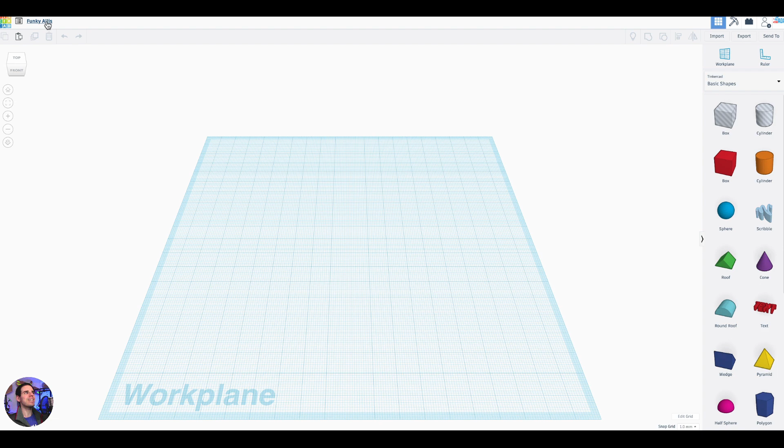Up at the upper left-hand corner, we have the name of our item, which we can change. It just gives us a random name. We have some options here like to copy, paste, duplicate the items, and delete the items. And we have our undo and redo buttons.

Also, you can navigate around the workspace using this little three-dimensional box thing right here. And here we have some different viewing options. What you can also do is just right click and hold, and that will rotate you around the work plane.

Or you can, in my case, I have a little scroll wheel on my mouse, and I can click down, press down on the scroll wheel, and move left and right around the work plane. By the way, I am on a Mac, but the controls should be mostly the same if you're on a PC. You can also do shift and right click and hold it down to do that left and right movement as well. But for me, it brings up the right click menu, so I just don't use that.

On the right-hand side up at the top, we have import, export, and send to options. We have the option to create a work plane, which we don't need to do right now because we have this one. We do have a ruler option, which we will use in just a moment. And then we have basic shapes.

So on the right-hand scroll bar, we have all these different shapes. And the way Tinkercad works pretty much is they give you all these different shapes, and you can combine them or cut them out with other shapes to create new shapes. So it's very basic in that sense.

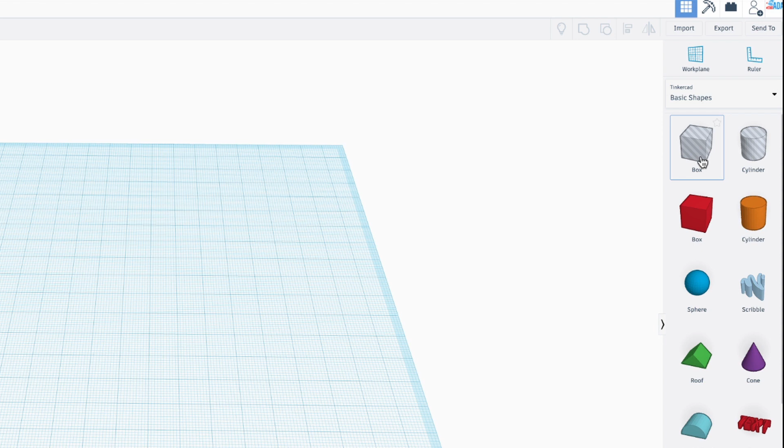You also have some other options, like you can make different connectors that they give you, some different shapes that you can work with, which is pretty cool. But right now we're just going to use the basic shapes, and these particular shapes at the top are grayed out because they will make a hole when you combine them with other shapes. Speaking of combining shapes, up at the right hand corner here we have some options to combine the different shapes, which we'll use in just a moment as well.

So that's pretty much it. And then you can use your left click and hold to select different items, for general selecting stuff. So the first thing we want to do is grab our ruler.

So we will grab our ruler, drag it, and put it really anywhere. You can pick it up and put it anywhere on the work plane. Think of the work plane like our tabletop, that's our work area.

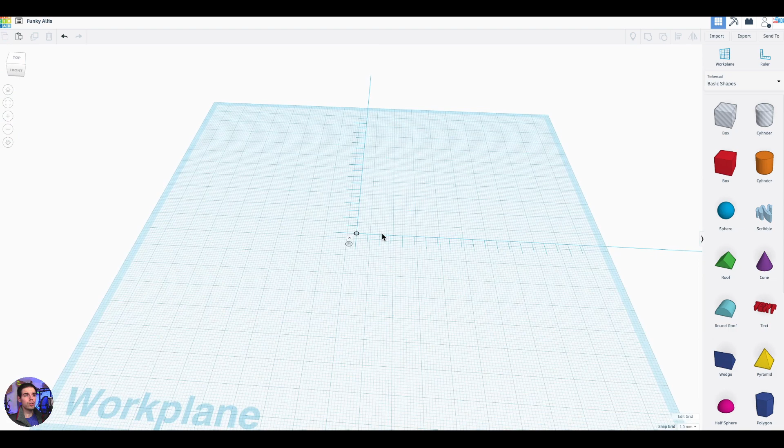Also, the scroll wheel is for zooming. So if you have a scroll wheel on your mouse, that's going to be for zooming. Otherwise, you can zoom using the little buttons on the left-hand side.

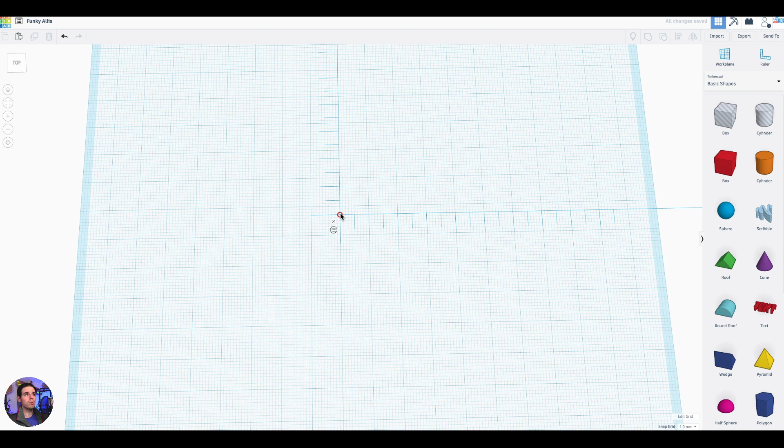So that's how you can move around and navigate in this space. The actual ruler is important because that's going to help us place things properly for dimensions. It doesn't matter where on the work plane you put it, but usually the center is where you might want to put it. What matters is that we have the ruler, and you could think of it like the y-axis and the x-axis—basically two different axes on this ruler, and that's going to help us a lot to get all the dimensions correct.

Now we'll actually start building the front of the motor mount, where the motor will attach to. To do that, we're going to grab a box shape—just a box shape. You can see it's a three-dimensional shape. Let me move it right over here.

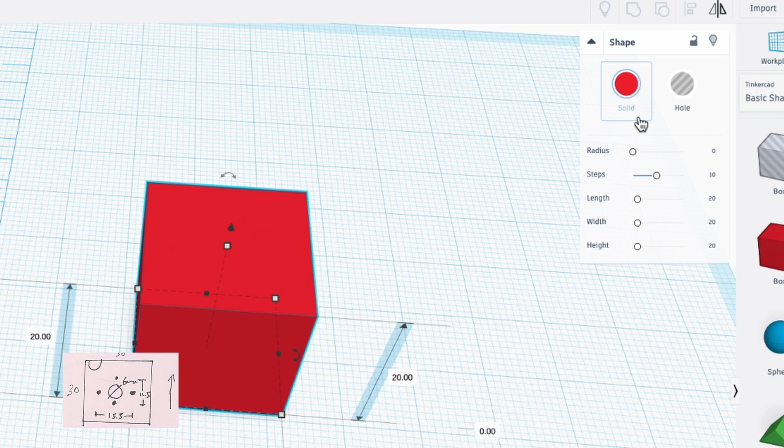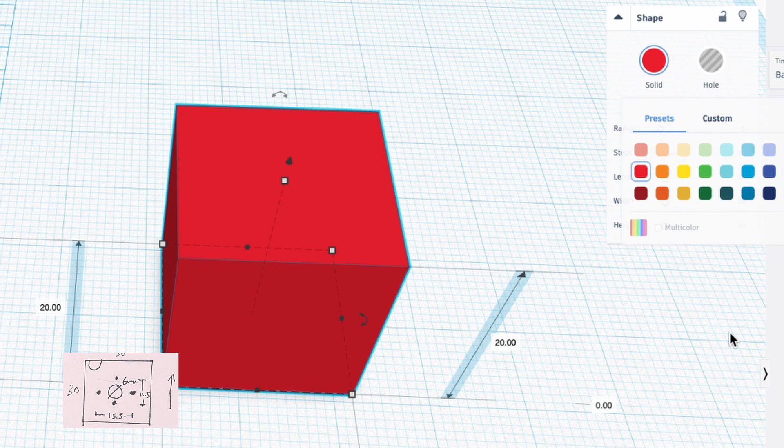So to show you around with this, in the right hand corner here we have some options. We can make this a solid shape, which is what it is right now, or we can make it a hole shape—this grayed out shape will actually cut into another shape when we combine it with another shape. So if you want to make a hole in something, that's great, which is what we'll be doing in just a second. But for now, let's leave it solid. You can also change the radius of the edges, and the steps of the radius, but we'll leave it just square for now.

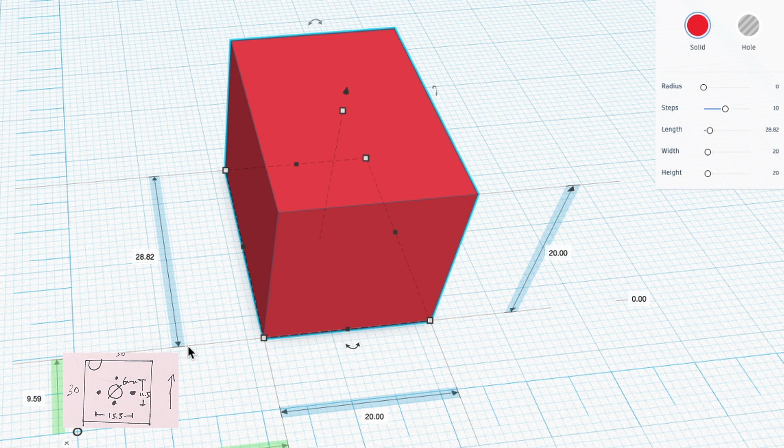You can also change the length and width and stuff—that's one way of doing it on that little menu right there. Speaking of dimensions, you'll see these arrows highlighted in blue, three arrows for the three dimensions. So we have this longer one right here, telling us it's 28.82 millimeters. Right now everything is dimensioned in millimeters.

To change the dimensions, we can grab one of the corners and move the shape around freehand. Or we can grab these white rectangles, or white squares, and just move one dimension of the shape like that. Or if it's on the side like that, we could grab it in the middle. That's how you can change the dimension there.

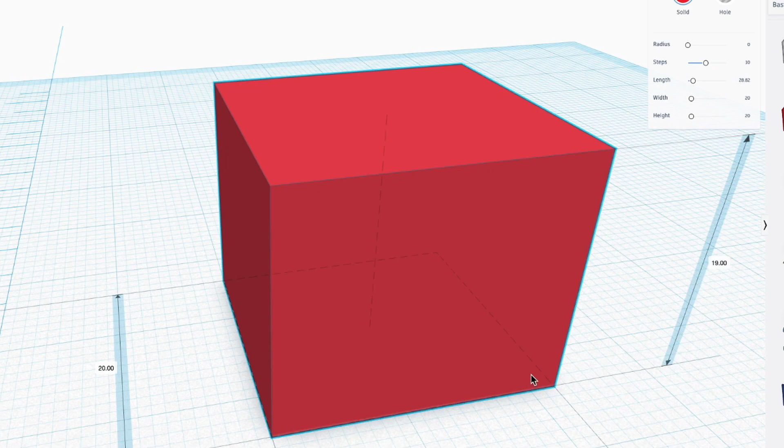The other way, which is more precise, is to actually type in a specific amount. So maybe you want like 23.5, and then you can type that in right there in those little boxes. That's usually what you do if you want a specific dimension.

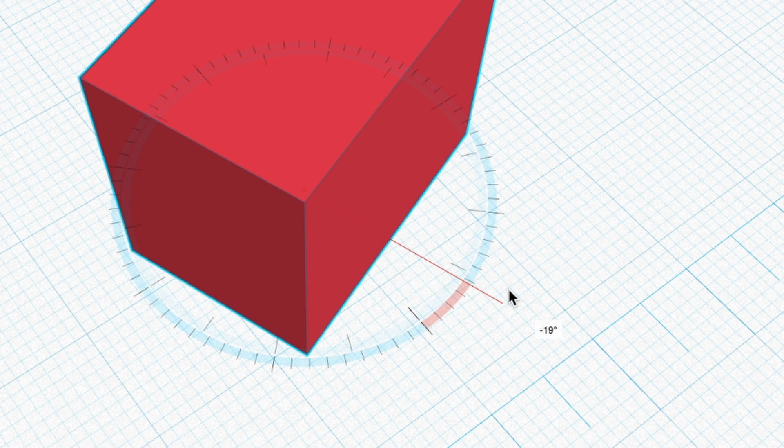As far as moving the shape around, you can grab these black cones—for moving the shape up and down, on the vertical dimension, you want to grab that black cone or triangle right there, and that's how you can move it up and down. You can also rotate the object using these rotational arrows, and it'll give you a little compass dial. If you pull out to the outside of the degree measurements, you can be more precise. If you go on the inside, it'll give you big chunks as you move it, like 30 degrees or 22.5 degrees, so you can do 45 degrees.

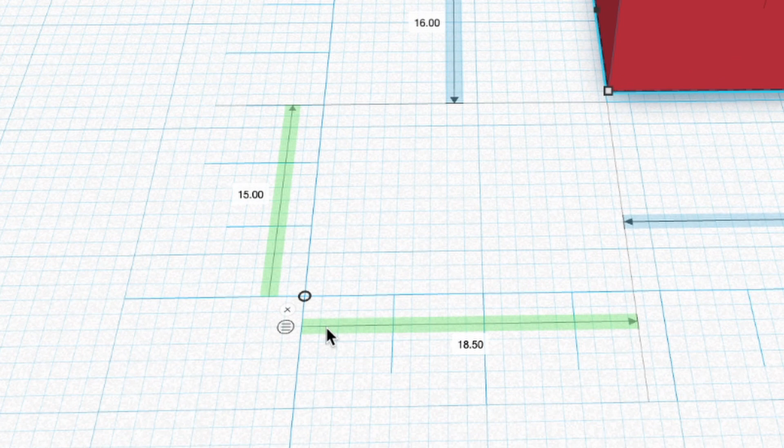Okay, we're almost done talking about dimensions, but one more really important thing: you'll see these highlighted green arrows right here. You have two for each axis, and then another one usually off to the side over here, which is for your vertical axis—that tells you how high up your object is from our work plane. Then these other two, close to the center of our rulers, tell you how far that object is from the center.

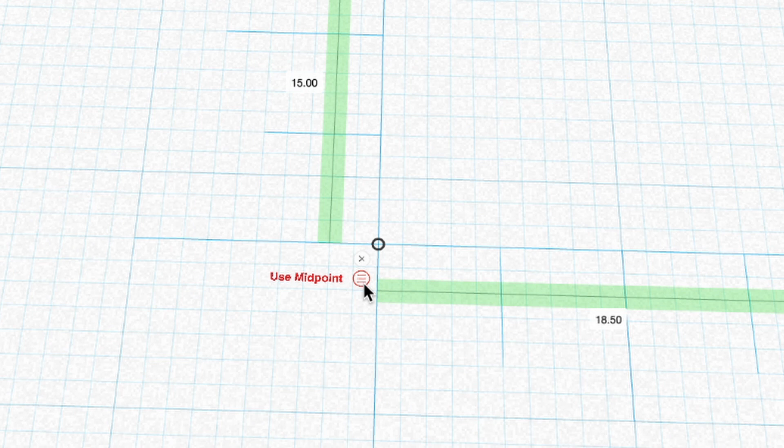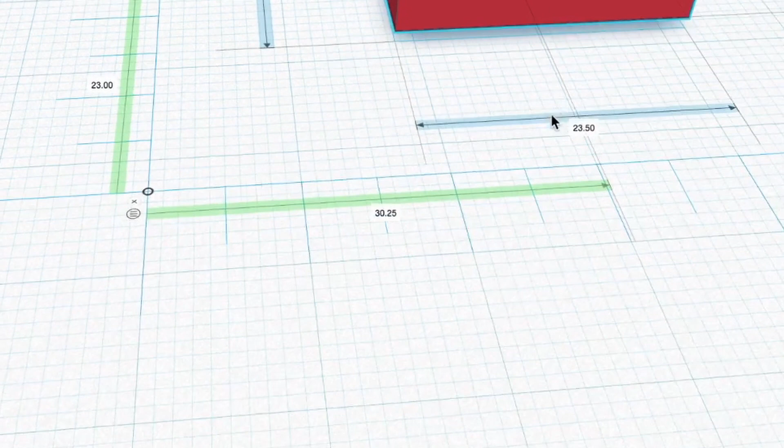Now, this is a really important point right here. This little circle with the lines through it, you'll see it says use midpoint. That's giving us the option to use the center of the shapes. So for example, when I change this, you see these shaded green arrows, they go all the way to the middle of this rectangle. And if I click on the little circle with the lines through it and say use endpoint, they will get shorter, because they're measuring to this endpoint, basically the corner of the rectangle.

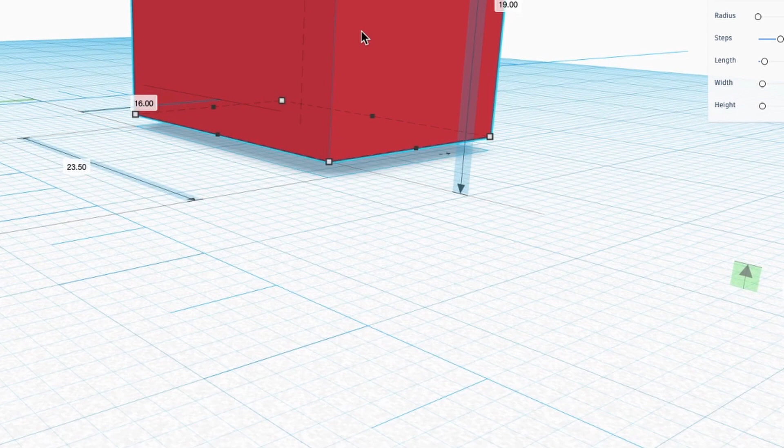Also, another thing that might catch you by surprise is this guy right here that tells us the vertical distance of this object from our work plane. If we go back to using midpoint, then it will tell us how far the middle of that object is from the work plane. That could be confusing if you're trying to get everything at the same height. So keep in mind that that's going to always be half of the actual object, or half of the object plus the distance that it actually is off of the work plane. Just keep that in mind, but we shouldn't run into too many of those problems.

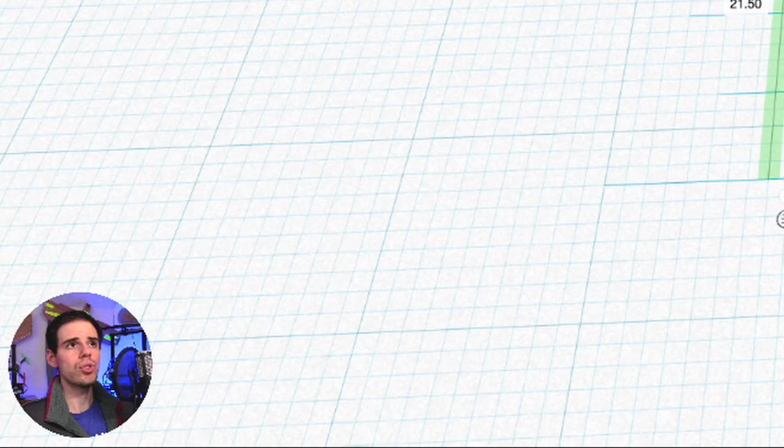So we're going to start with this basic shape here. Again, we're using the midpoint of the shape, and let's make sure that shape is actually touching the work surface. So I can drag this down a little bit and it is flush there, and you see it snapped into place, and that's because if you look at the bottom right of the screen, where it says snap grid, it tells you how precise you want the snap level to be.

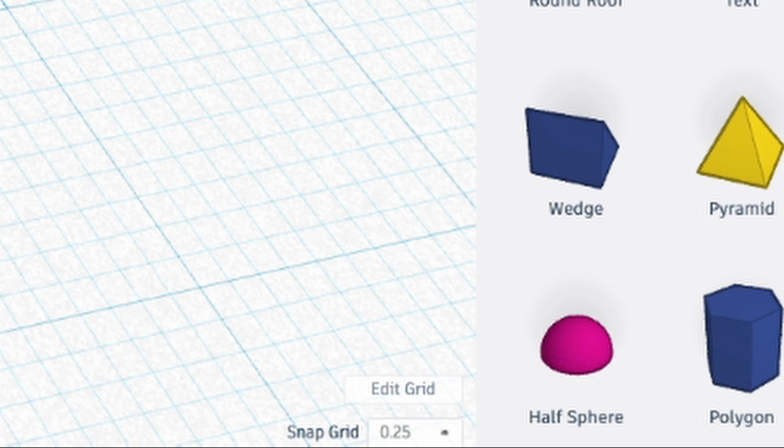So you could say 0.5 millimeter or 0.25 millimeter. I think we'll need 0.25 millimeter probably. I like to keep it pretty precise. And so that allows you to be more precise about how you position your object.

So now that we have that taken care of, what we can do is we can center this square, or this rectangle shape, right in the middle of our workspace. And so to do that, we can take these two highlighted arrows and make them 0. I'm going to enter 0 into those little boxes, and you'll see it snaps it on both axes to the very center of our ruler, and that's very useful.

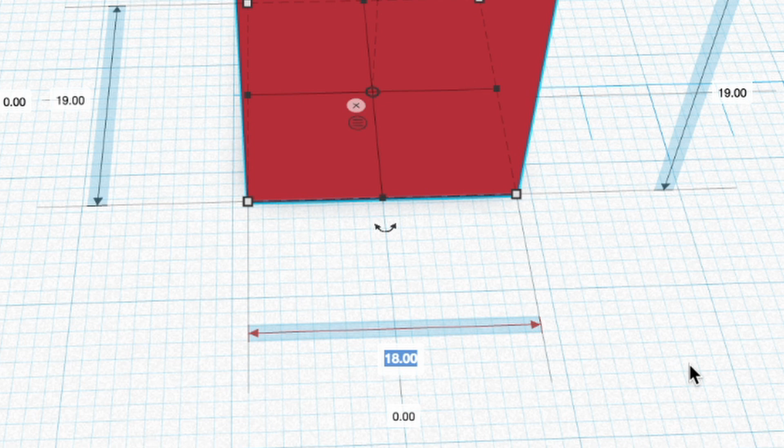So now we can dimension the box, and as we wrote out, we want this to be - because again, we're going to work on this and then rotate it and flip it upward, or we really don't even need to do that necessarily - but anyway, this is the part where the motor actually attaches to. So this is going to be 30 by 30, and again that is millimeters. And then for the thickness, let's do 3 millimeters and see how that works.

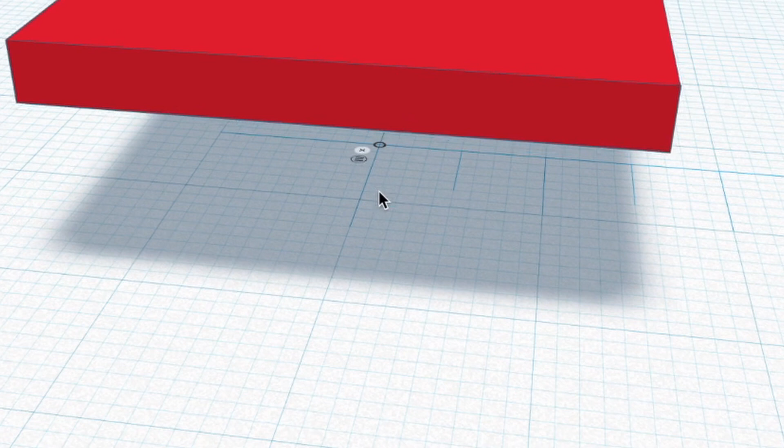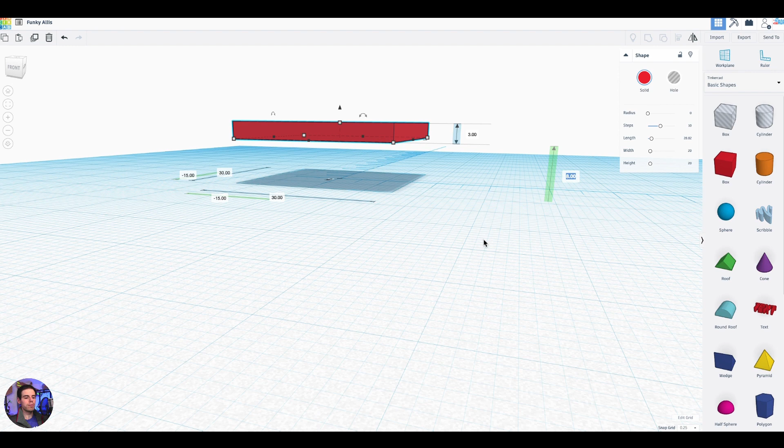Now you see here, because we have this set to the center point, it actually sort of squished it. It changed the dimensions from both ends. So that's kind of annoying. So an easy fix for this whole thing floating in the air, to get it back onto the level surface, is we can change our reference point to use endpoint, and then we can go over here - this is telling us that this block is 8 millimeters above the work plane - and we'll just type 0 for that, and then we can change our reference point back to the center.

So you see those lines, they change from the center to the corner there. Okay, cool. So now our basic shape is done for the front of it.

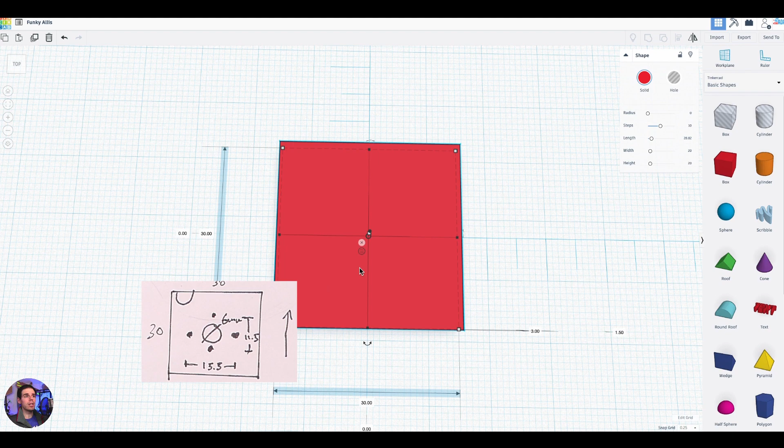Now we need to make the holes for our motor mounting screws and the cutout for the actual motor shaft and retaining clip, because you always got to remember that, because that's one thing I always forget. So what we'll do is we'll get a cylinder in the right hand corner here. We'll just drag out a cylinder. You can see that cylinder is way too big.

And the little shape menu here will say we want it to be like 64 sides, so it's nice and smooth. And then we'll change the dimensions of the cylinder, let's say for the center, let's make it 6 millimeters, a 6 millimeter diameter hole. And the height does not matter because we'll just be adding it to the shape and it will sort of disappear.

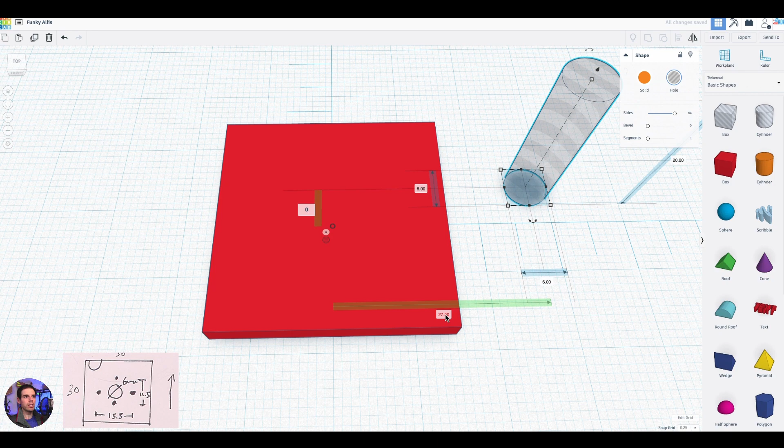So here we can again center it. So we'll, on those green shaded arrow bars and the little number box, we'll type 0. And I'm just typing that and pressing enter. And so that works well. So just to show you how this works when we have a hole object or a grayed out object, you can see on the underside, you can see actually where the object is as well.

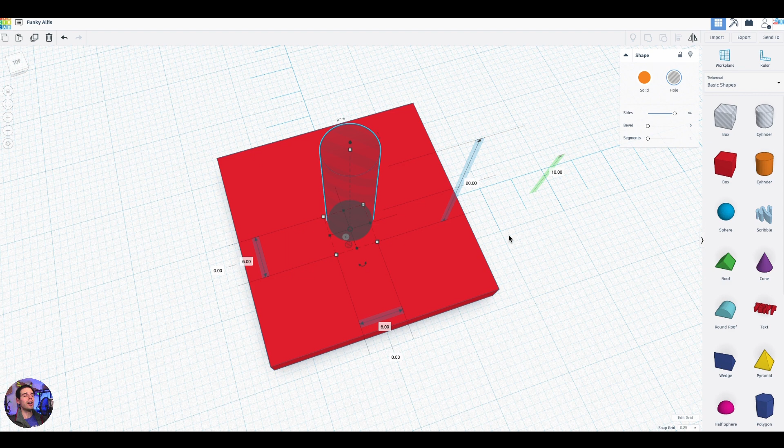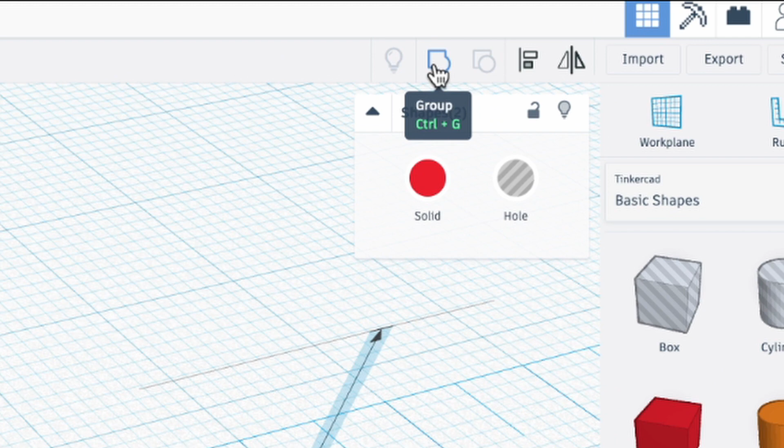Okay, so just to show you how it works when you combine two objects, you can either drag this little selector over all the objects and it will select all of them, or you can click on each object and then click shift, click on an object and then click shift, and it will select both objects. And then over here in the kind of top right corner, you see it says group. So you could also do control group or control G, and we'll group it, and then shabam, look at that. We have a nice, perfect hole in the center of this square.

And so that just kind of makes that shape disappear, basically. If you want to undo that, you can click ungroup, and then it will bring back the cutout shapes.

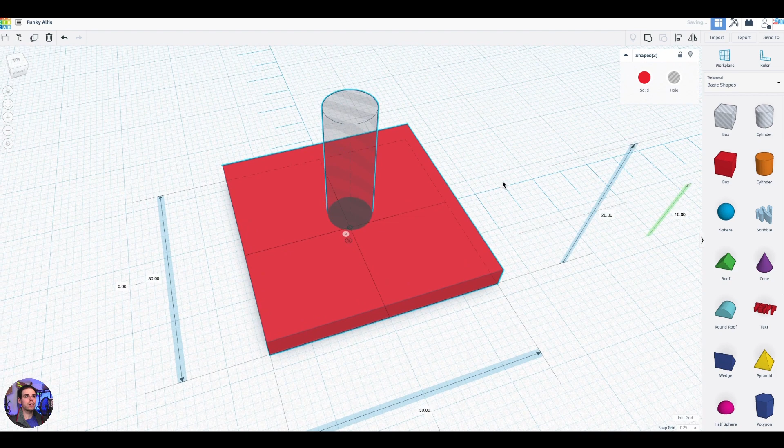Now I'll show you what you can do to copy this. You can actually, on a Mac anyway, you can hold Alt and then drag the object, and you will create a copy of it. Or what you can do is you can select the object, and then you can click duplicate and repeat, and then you just drag the object out, that duplicate object, and you can drag it wherever you want.

So now what I'll do is I'll change this from, instead of 6 millimeters, we'll change this to, let's say 2.5. That should be somewhere in the right area. And we may even want to use washers anyway with this, but we'll say 2.5. Give it a little bit of margin for error there.

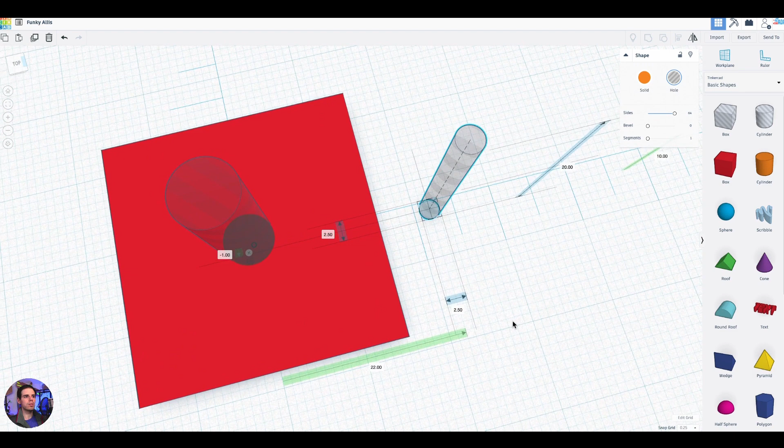Uh-oh. Well, that is one of the downsides of using an online editor, is that if you don't have internet, you can't edit anything. Okay, we're back. That was weird, but we are back.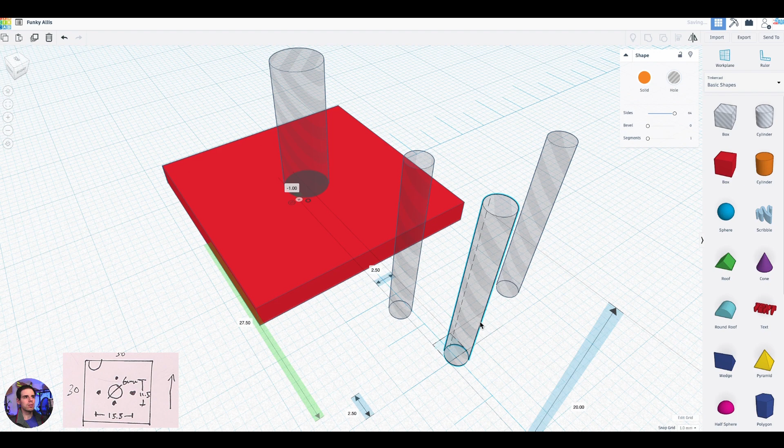That happens sometimes. So now we have our 2.5 millimeter hole, and we're actually going to need like a bunch of these, so we may as well just make a bunch of duplicates. We could do that. Well, we're going to need 4 in total.

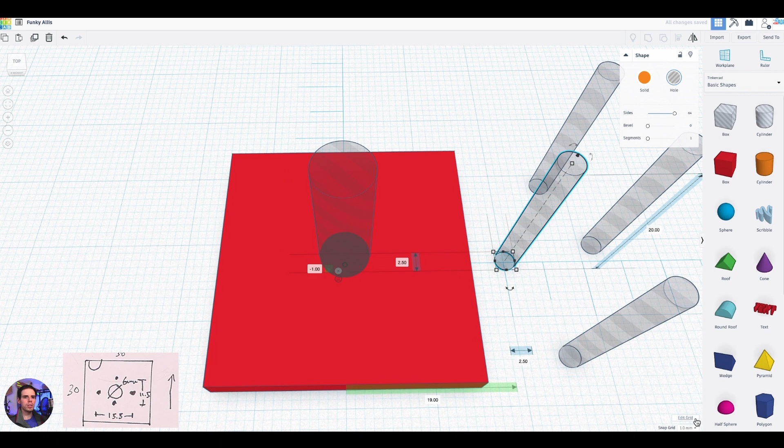So what we can do here is we said that we want vertical and horizontal hole spacing. All right, so let's knock out the horizontal hole motor screw holes. So what we'll do, oh, and you know what? When it restarted, the snap grid went back to 1 millimeter. So we need to actually change that back to 0.25 millimeters, so we have a lot of control over this.

So what I want to do is make this right on this axis. So right here you can see it says -1. I want to change that to 0 on that green shaded bar. It's a little hard to see, but, let's see, is this midpoint? Oh, okay. So we had to change it after it restarted. We had to change it back so that it would go back to the midpoint.

Let's say 0. Good, so we are right in line with this center hole of the motor shaft. So then what we want to do is, since the total distance according to the measurements we took between the centers of the holes is approximately 15.5 millimeters, half of that distance is going to be 7.75 millimeters.

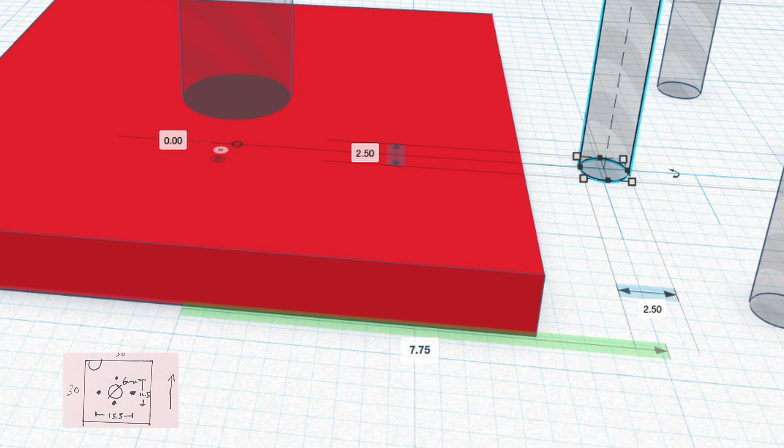So we want this particular 2.5 millimeter hole to be 7.75 millimeters from the center. In this box for the green shaded arrow, I'll type 7.75 and enter, and that's where the hole should be. So that works out really well.

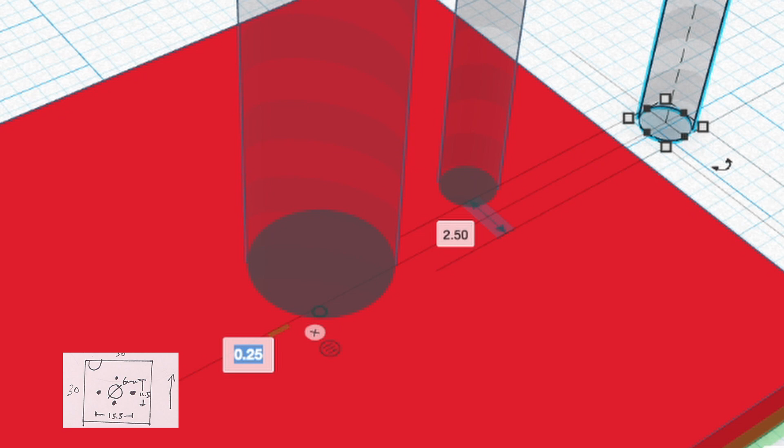We can do a similar thing for this set of holes. We have our other 2.5 millimeter hole right there, and we want this centered along that axis, the x-axis. So we'll type 0 so they're all in line like that. It's kind of hard to tell from that angle.

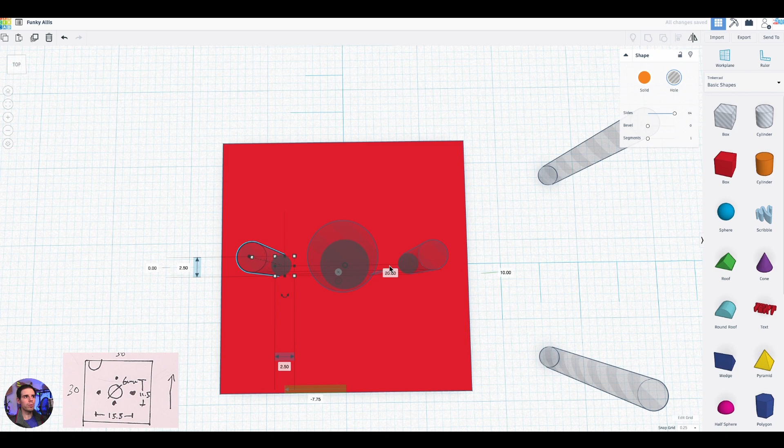Now instead of 7.75, since it's on the other side of the axis, we actually want it to be negative 7.75. I'll type enter, and look at that, it's on the other side. That should theoretically line up just right with those holes in the motor for the screws.

And we'll do a very similar thing for the top and bottom. Over here we can drag it to the general area, and actually that snapped right on the axis there. So now we can say the total distance between those two was 11.5 millimeters from the center, and again we're doing center point measurements from the center of the object.

And we can say half of that is going to be 5.75. So we'll say positive 5.75 and enter that in there. Now we can do pretty much the same thing with the other side, or the bottom. We can make sure that this is, yep, negative 0.25 off.

So we'll make it zeroed up on that axis, we'll call it the y-axis. And then we'll say we want this to be negative 5.75. That should work, unless my math is just totally bonkers, which is a possibility.

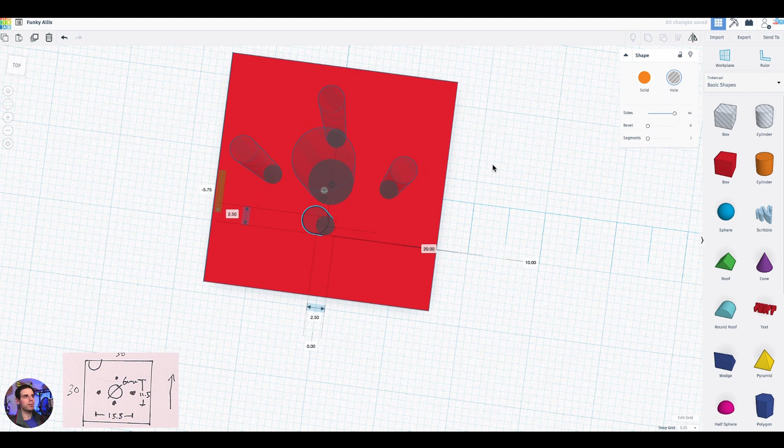So now we should have all the holes that we need in our motor mount. We have a nice motor mounting pattern right there. And again, this is just one way of doing this, just kind of slapping this together, but hopefully it's a good example. So we'll select all of these items and then click group, and shazam.

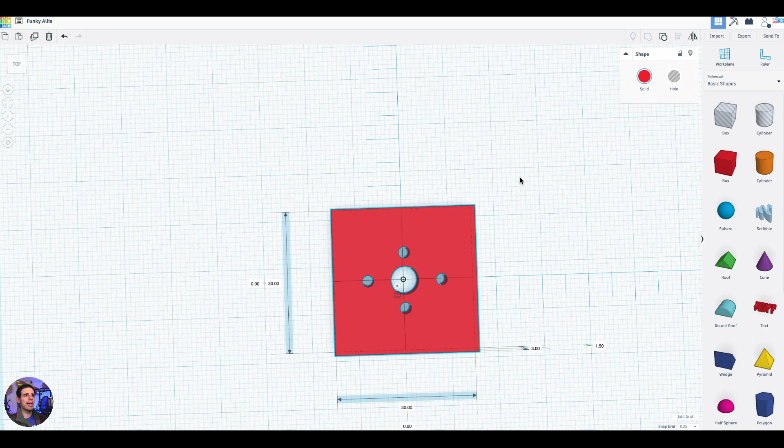One more thing we should probably add right now is a little notch for the motor wires. So what I'll do is make a little detent, if you will. I can just freehand this shape, make it something like this.

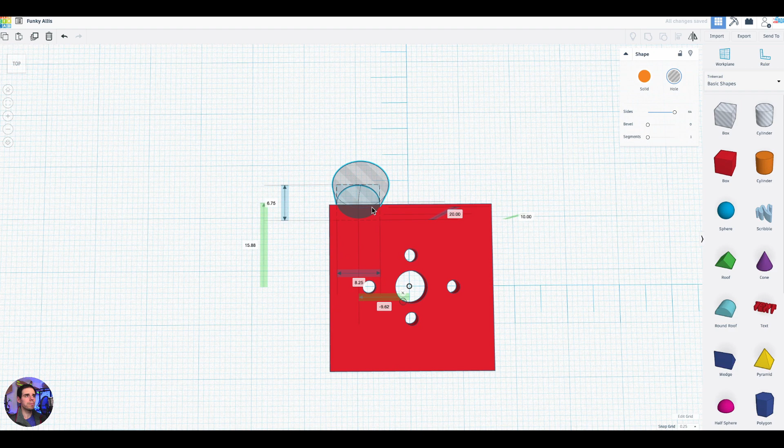Generally you want to make nice curved, smooth shapes because that results in less stress in critical areas, or it's less likely to break due to stress. So something like this, so the motor wires can come out the side or come out over the top, but not actually be above this little cutout right there. I think that could be very helpful.

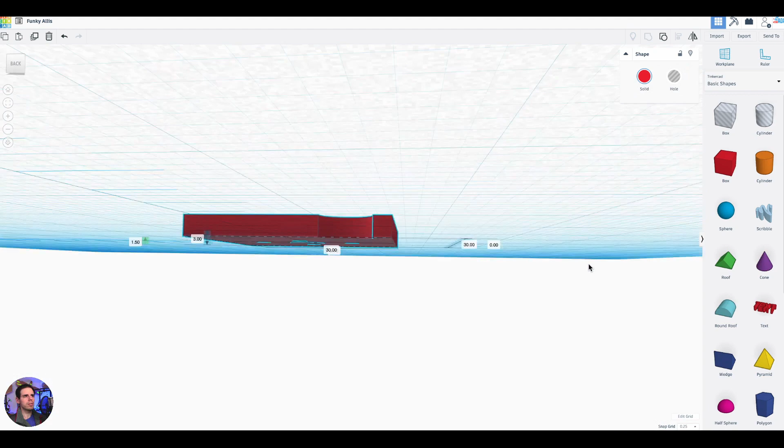In fact, we could probably bring that down a little bit more. Sure, let's try that out. We'll select both of those shapes, press the group button, and shabam, we got ourselves a new shape. It's not perfect, but that's what's cool about this, it doesn't really matter, and you do have some freedom there as far as making the different shapes.

Okay, cool. So now that we have this part, which is basically like the motor mount plate area, which you could actually just glue straight onto the end of an airplane if you needed to, but we'll make it an actual freestanding, self-supporting motor mount. Now here we have a couple options.

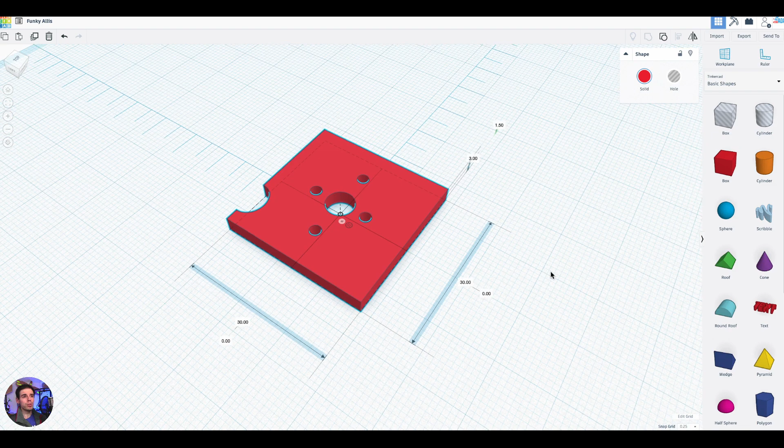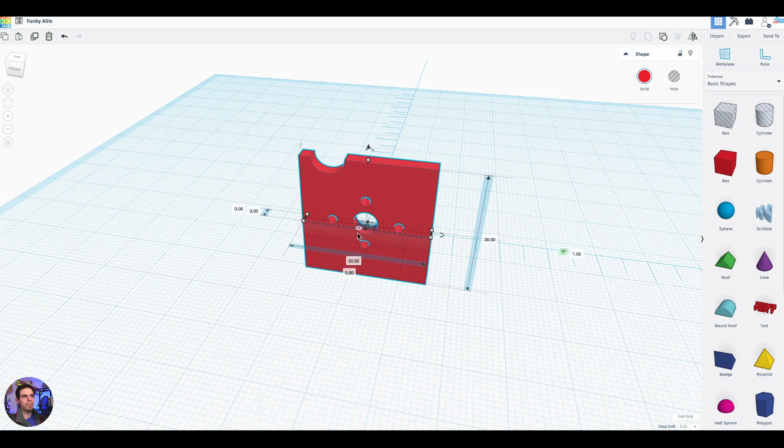We could either build the base and the sides upwards, like vertically, or we could take this whole part right here and rotate it 90 degrees, and then build it on a flat area, which I think we'll do since that gives us a better perspective of what this will actually look like.

So to make sure this isn't in the middle of the plane like it is right now, I've selected to use the end point, and I'm going over here on the vertical distance where it shows the vertical distance. I'm going to type in 0, bring that back up right onto the work plane. And then we can go back to using the midpoint because that's what we'll want to do.

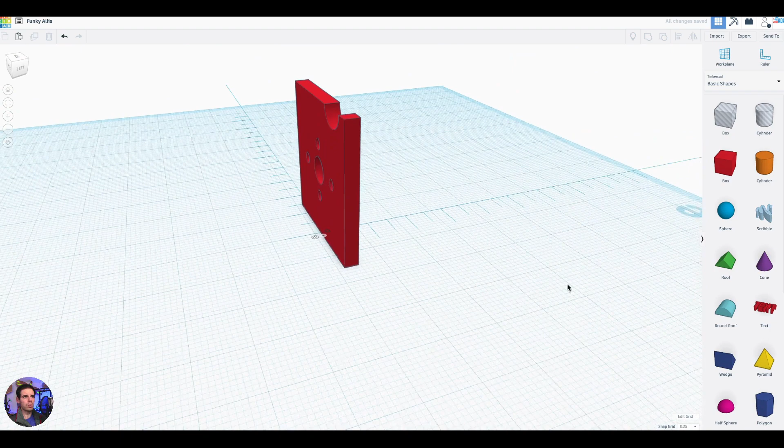What we can also do is, if you click on the very center of the ruler, it will change which direction the ruler points to. So this way we flipped it around, but I want this to be the back, so now we have a ruler on the back side of this, which is nice.

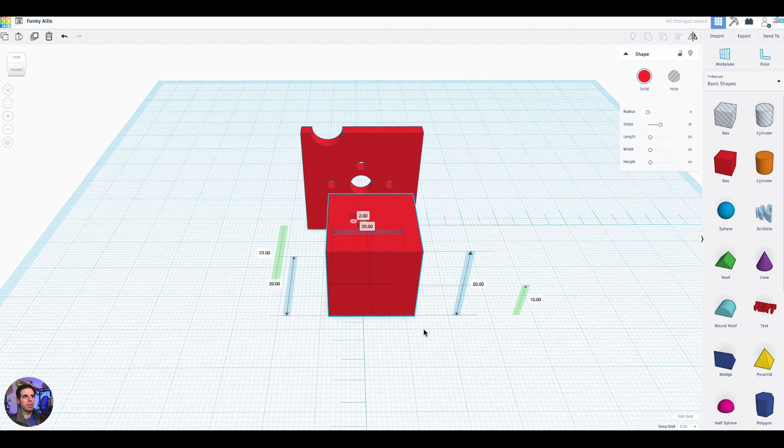There are different ways you could do this, but the main point is now we need to add a base to this. So let's get our box shape again, and we know we want the width in this direction to be 30 to match the front, and we want the thickness—it probably doesn't need to be that thick really. Let's just do 3. Oops, not 30, 3. I want 3.

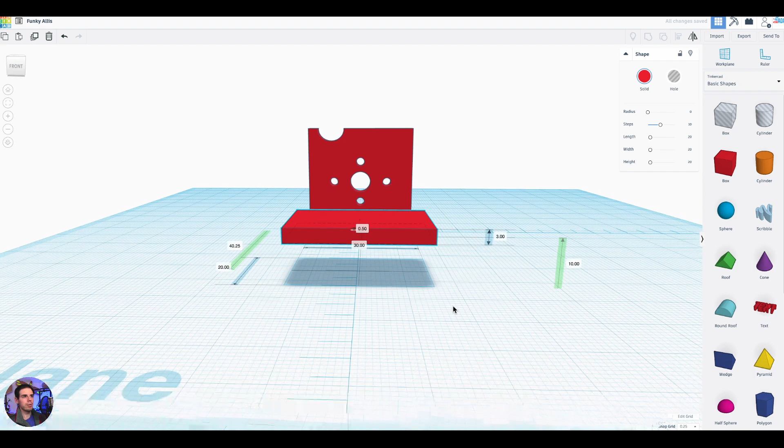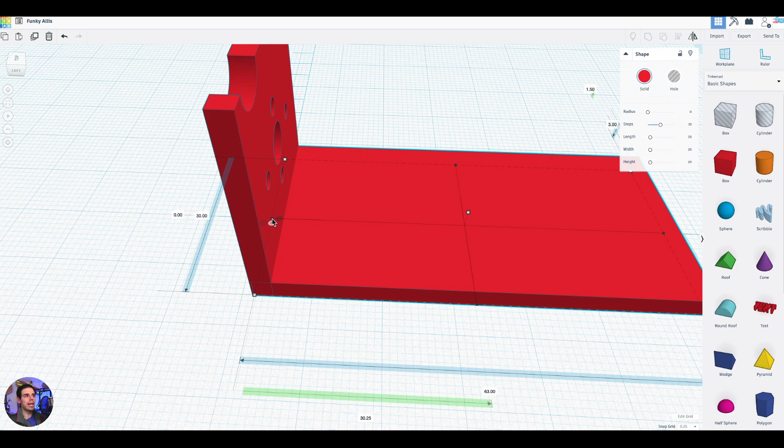And let's make it, we could just drag this, let's make it like 60. Then again I'm going to click so we're using the endpoint as a reference, and hit 0 on the vertical distance. Don't get too confused by that, but I'm using it because it's easier to make it snap to the work plane. So for here we can kind of eyeball it, and since the actual length doesn't really matter, we can just drag the length. We could even overlap the length, it doesn't really matter. And now that we have that, we're like, okay, cool.

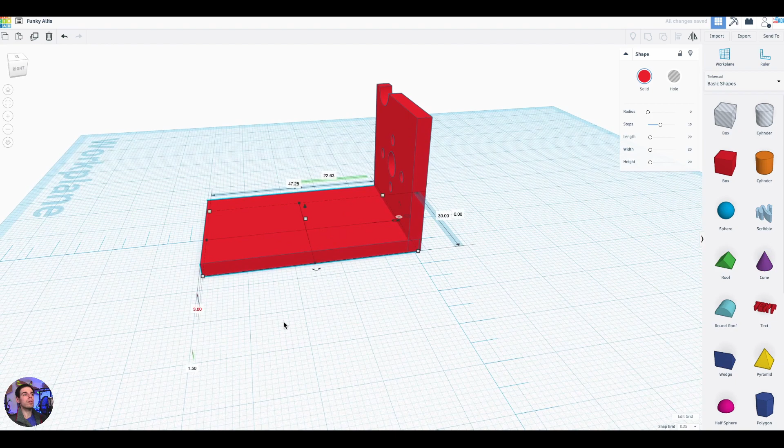We could drag the length of this shape from this side to make it shorter or longer. Probably shorter is good since we're talking about weight considerations. Okay cool, so there is the base of the motor mount, and that is 3mm also, so this will be a nice strong motor mount.

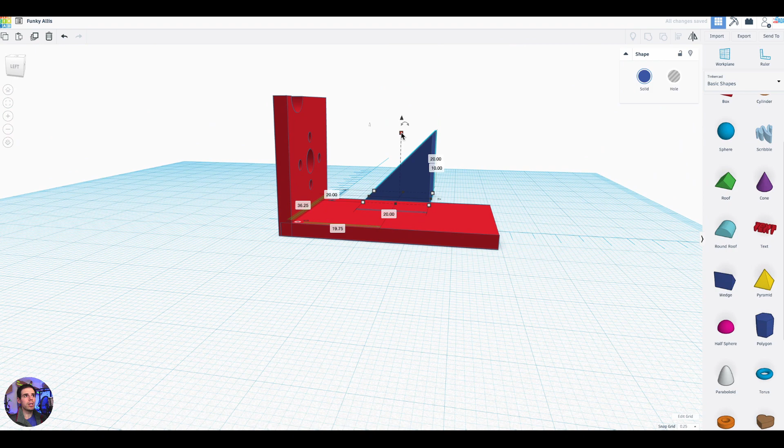Now we need to add the sides. There's a couple ways we could do that. We could use a wedge—a wedge would probably work well. So here we have a wedge shape, and we can change the shape. In fact, a wedge will work perfect actually.

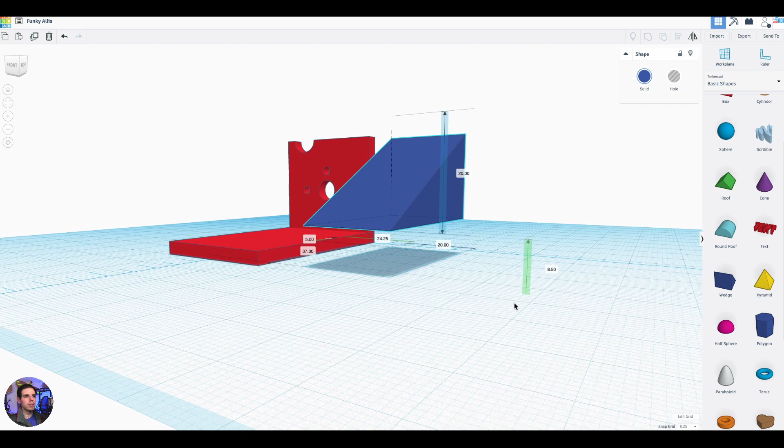So we can adjust how tall we want it, and let's rotate this 90 degrees so we have a nice 90-degree angle on one side, and we can just match that up like that. That looks pretty good. And again I'm going to go to this little circle with the lines on it near the center point and click it so we can easily use the bottom edge as a reference, then type in 0 for the vertical distance and get it back on the ground.

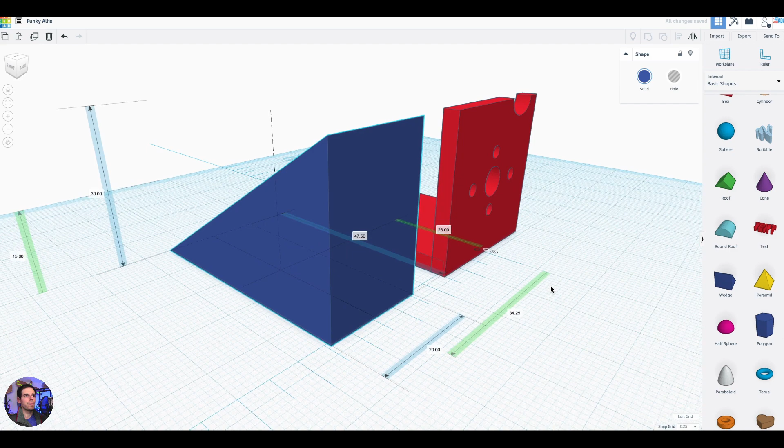Since this doesn't really matter, we can just leave it on the ground, and when we bond the two shapes together or group them, it'll be okay that they're overlapping each other. We can just look at that and say okay, that looks pretty good. We need to make this a bit taller—we could make it like that tall, something like that. That's about the same. In fact, that is the same. Well, how about that?

So you could do it by eyeball, or you could type in 30 right there. That should work pretty well. And as far as the distance, it doesn't even have to go all the way to the back. It could go a little less, a little more, whatever, it doesn't really matter.

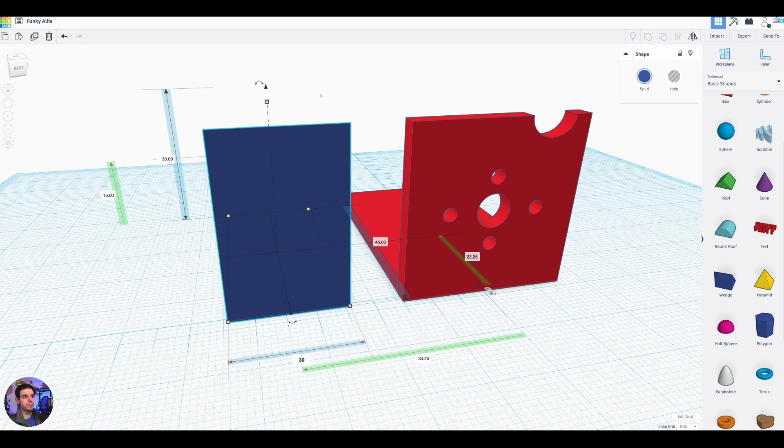The thickness, the actual width of this wall, we could make it 3mm. Not 33, we want 3mm. There we go, 3mm, so pretty darn thick. This might turn out to be like a super hefty motor mount, but that's the whole thing: you just try it, just do it, try it, see how it goes.

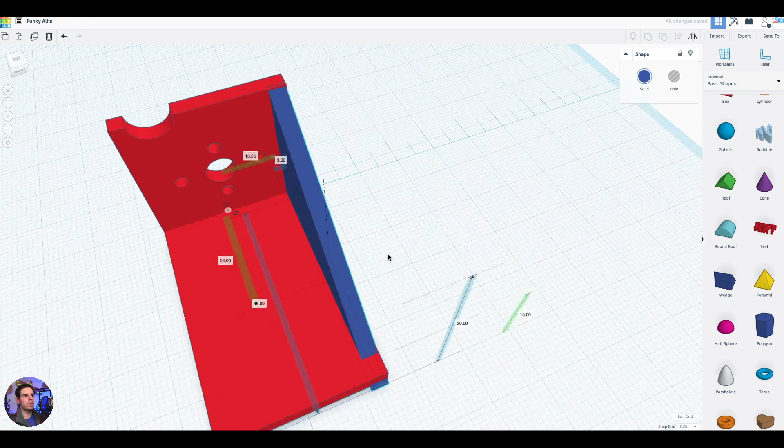And you see I'm just kind of lining this up on the side here. You can also use your keyboard arrows to snap this into place. And it looks like the 0.25mm adjustment is actually too large to get it to center up, or to be even with the edge.

So I went ahead and adjusted that down to 0.1mm, which is probably more precision than you really need, certainly for a project like this. But, you know, why not? I'll tell you what, one thing I tend to do is I enjoy this type of thing.

So I really like to tweak things and try different options, be like, oh, maybe we could put this here, maybe we could move this over just a little bit. But for these purposes, I'm going to have to just blast through this to make this actually a watchable video.

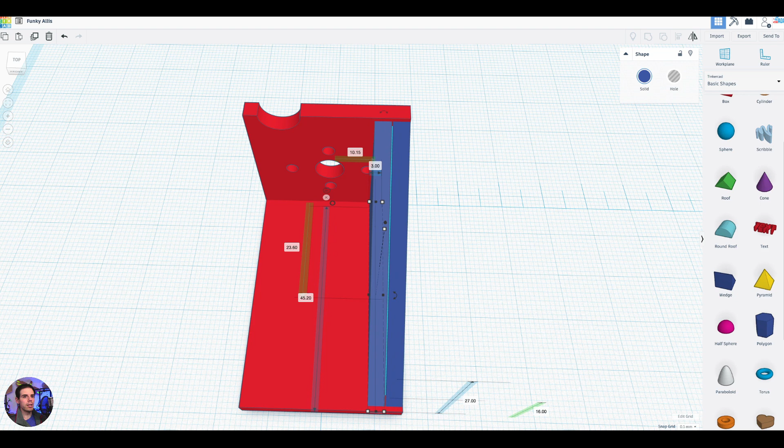Now we will just duplicate that shape and take it over to the other side. But since I don't necessarily want to move any of the other positions, I'm just going to use my left arrow—actually that's going to take forever, so I'm going to change this to 1mm increments.

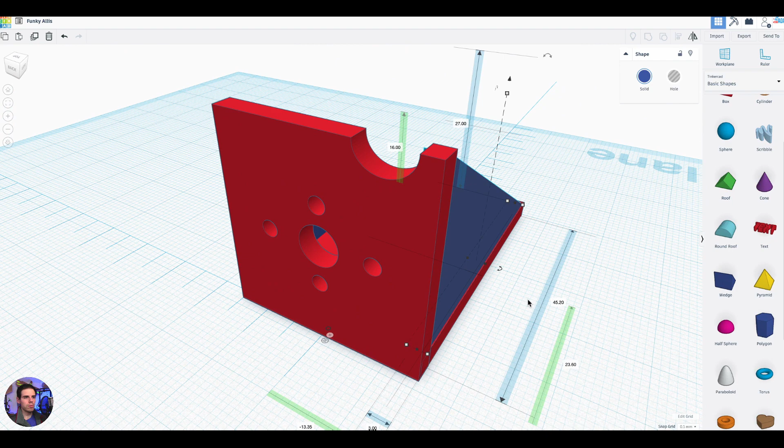I'm going to use my left arrow and just slide it over, and that should work pretty well. Then I can change the snap grid back down to 0.1mm, so that I can get this just however I like it. But it doesn't have to be perfect, it really doesn't. So that looks pretty good.

Let's see, how does this look? Just for funsies also, see how this side right here cuts into, or kind of sticks out of, this little notch that I created for the motor wires, and I don't like that. So either I could make this side of this support angle thinner, or what I can actually do—

is select this shape and then click ungroup, and it's going to ungroup the last shape that I grouped to it. Now you'll see that this oval shape is actually going to cut through the support shape, or this support angle as well.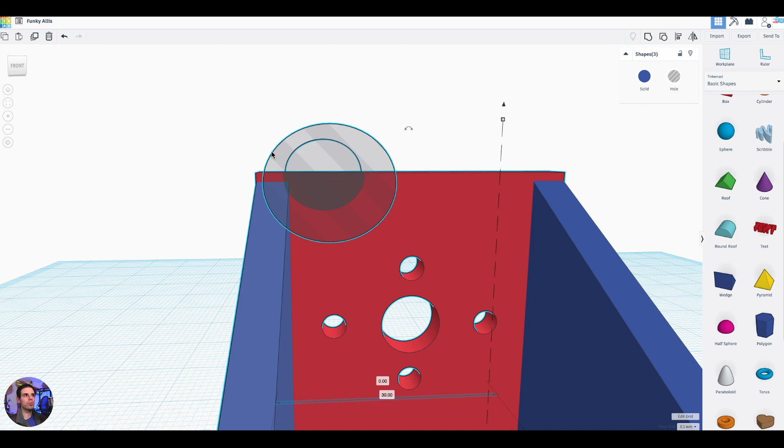I hope you guys are as excited about this as I am, because I think that's really helpful. So now if I group all three of these shapes, let's click group—shabam, look at that, see, now we have a nice cut. You'll notice it also changed the color, because this is now actually one shape, the support angle in the front.

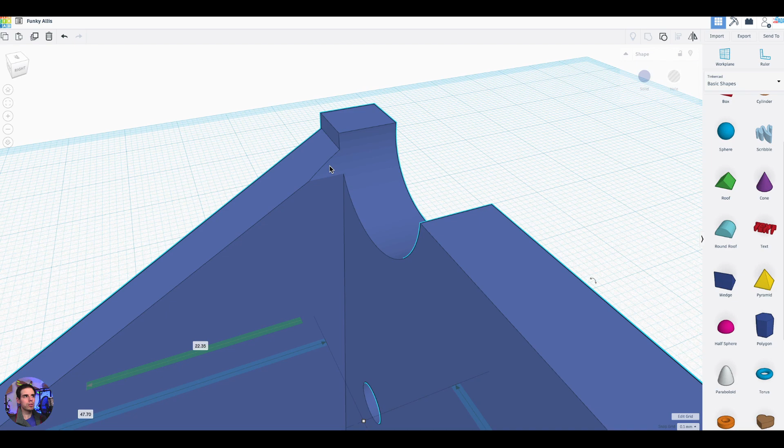Anyway, I think that's a little cool feature. That particular spot, that little angle, is probably going to be so small you probably won't even notice it much in the printing, but I think it's just a neat thing that you can do. So keep that in mind—you can always ungroup items and then regroup them as needed.

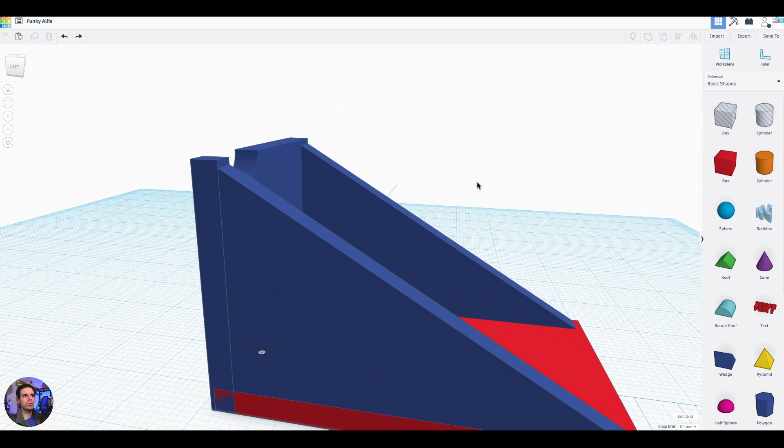Okay, a couple more things we could do here just to show you. For example, maybe you want the ability to put a barbecue skewer through here or something like that, so you want a hole going through both sides evenly. Well, what you can do is make a hole that matches up.

So let's say a barbecue skewer is, I don't know, 4 millimeters—probably like 5 millimeters, let's say 5 millimeters or so. So let's make this cylinder 5 millimeters. Then we can make it longer, like really long—it doesn't matter how long, as long as it will go through both items. Then we can just rotate it and drag it over here.

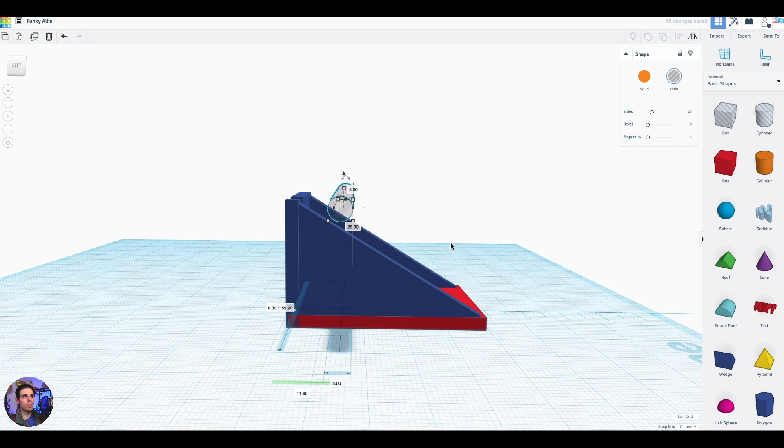And then we can drop it down so that it will cut through right there. So you could use this again, like maybe you want to use barbecue skewers, or maybe strap your motor mount down, and then you have two holes that line up perfectly with each other. That is very cool.

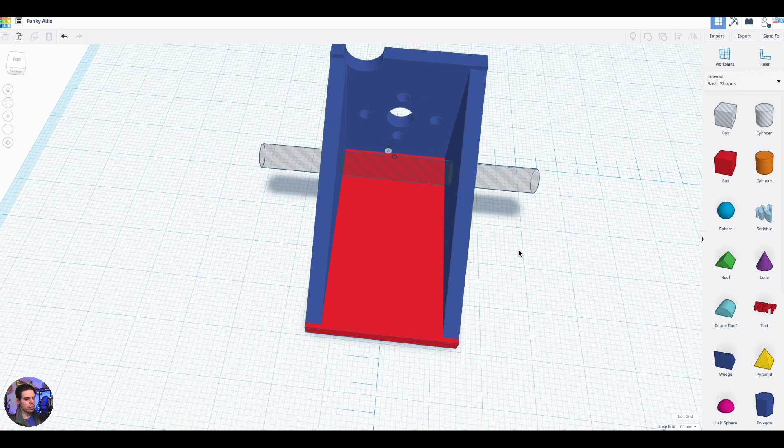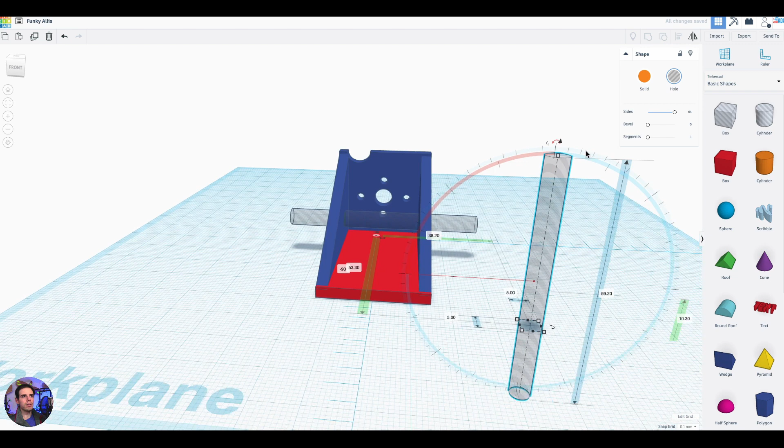You could also make cuts into the bottom here. So let's say we get a cylinder, let's make it have more sides. There we go. We could duplicate this guy, and turn it back over like that. Okay, and let's make it a little bit smaller, just to work with. And we could actually make this a little bit larger as well.

We could even put weird shapes, but let's say these holes are 10 millimeters, let's make some 10 millimeter holes. So we could take a cylinder shape right here and add some holes to either lighten the motor mount, or maybe you're going to glue it down and want some holes for the glue to seep into.

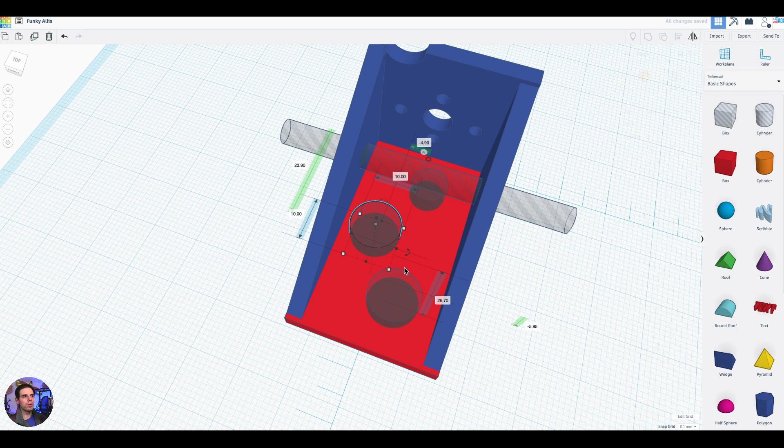Well, it kind of looks like Swiss cheese. Maybe those holes are a little too large. You can do whatever though, they don't even have to be the same size or shape. But you probably want to space them out so that it doesn't compromise the structural integrity.

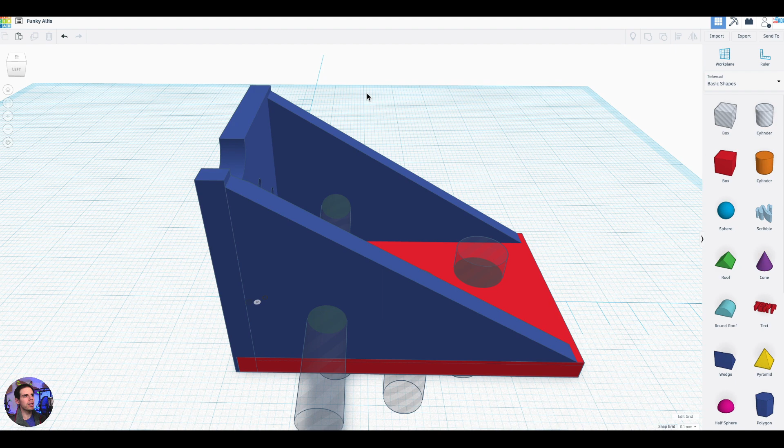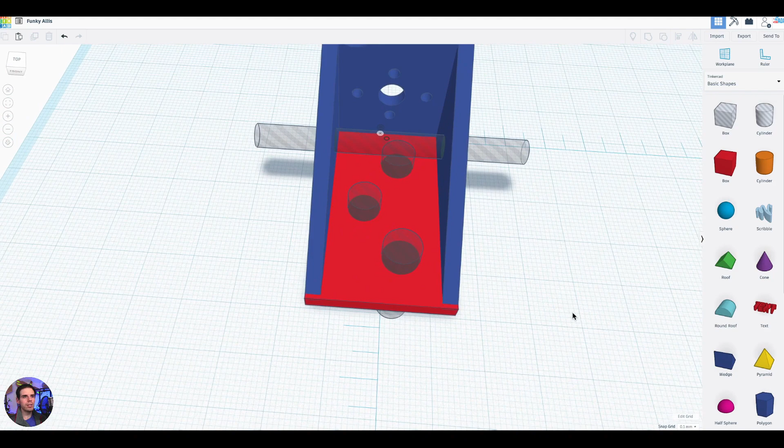Again, I'm kind of slapping this together because normally I would not leave something like this where you have an edge, a very sharp angle right there, because it just looks weird. It kind of bothers me. And when printing, you generally don't want to have sharp angles. Of course, that is exactly what we're doing right now. Can we change that? Should I change that? I really want to, but I probably should not.

Now the last step is all of the shapes that we have on here that we're using to build this model. We want to combine everything, so we want to group all of the shapes, and shabam, we get this brand new shape. This is our finished model, this is what it's going to look like.

Now, this is not necessarily the orientation that it's going to be printed in, but I think in this case this will be the orientation. But this right here is our finished model. Kind of looks like a block of Swiss cheese. In fact, yeah, it's like a Swiss cheese motor mount. That's kind of cool. Totally planned that the whole time.

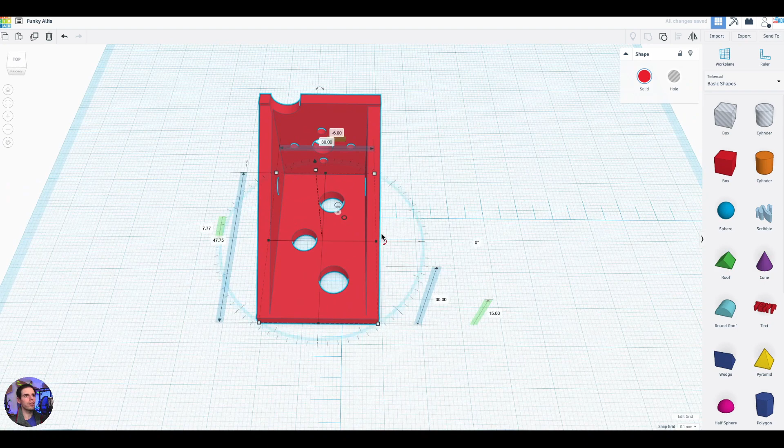Anyway, so this is our finished product. Now we can move this entire model, and everything will stay together. So now let's go ahead and change the name, we'll call this Swiss, we'll call it a Swiss motor mount. There we go.

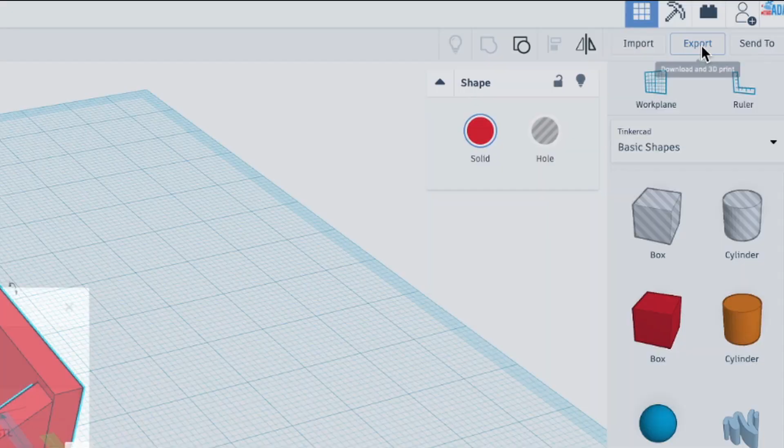And what we want to do is export this model. So we go over to the top right hand corner and click export. Then we want to export this, and it gives you the option of everything in the design if you have multiple items, or the selected shape. In this case we have just one shape in the design, so that's fine. We want to do it for 3D printing, and in this case we're going to do STL, that's going to be most common.

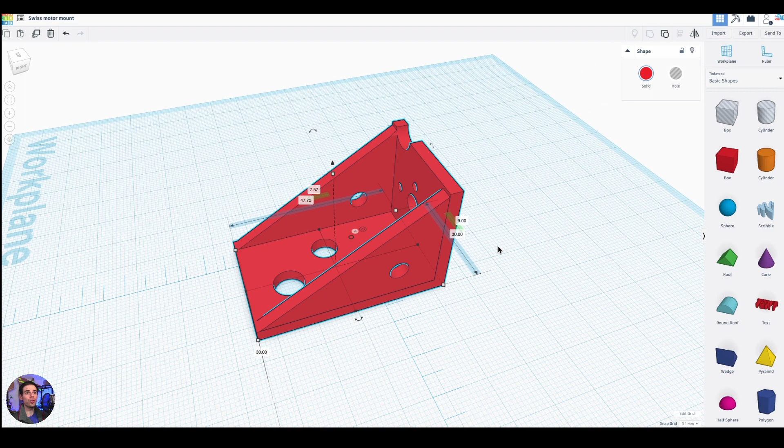And then it has exported, and it should be in your downloads folder right now. So now the next thing we're going to do is grab it out of the downloads folder and then put it into Cura to actually slice it.